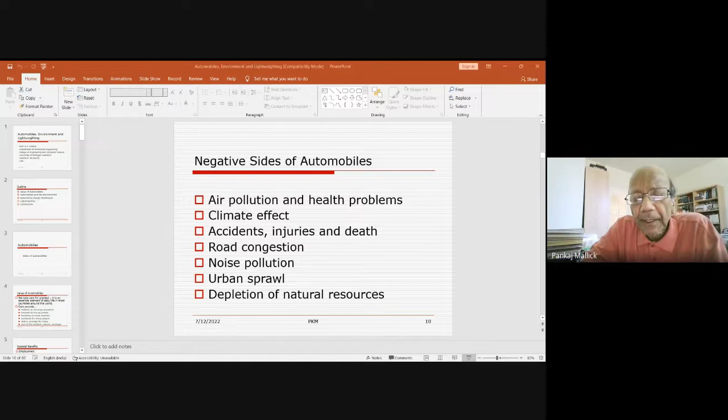I would say I'm at a crossroads between mechanical engineering, materials engineering, and mechanics of materials, or strength of materials. My experience has been in the automotive industry. Before I joined the university, I worked for Ford Motor Company for a number of years, which is not in my bio, but I was there. And I have had many research contracts from automotive companies as well as other organizations such as the Department of Energy and the National Science Foundation.

What I decided to talk about today is, in my opinion, very important for all of us: the environment, and what's the relationship between automobiles and the environment, and also how we can mitigate the problems we have with the environment. That's the topic I have selected.

With that, let me go to the first slide, if you don't mind. Can you project the first slide, please? I was able to see it before. Now I can see it. Yeah, Dr. Das, I think.

So that is the topic: automobiles, environment, and lightweighting. Can you go to the next slide, please?

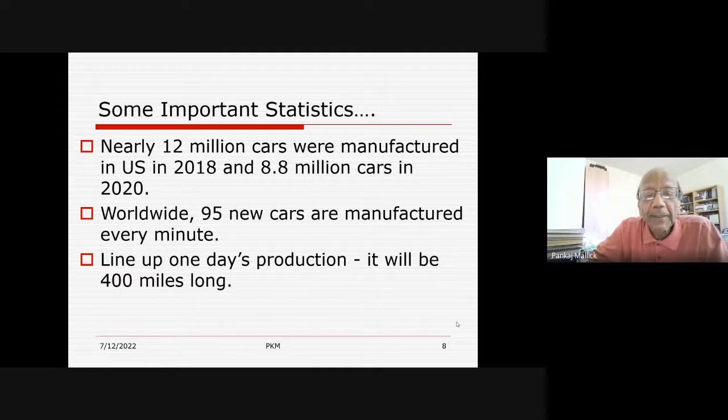Okay, so I've talked about the good things. Let's talk about some of the bad things that automobiles do to us. Negative side of automobiles: obviously it creates air pollution and health problems. It is connected to global warming through greenhouse gas emissions. It causes accidents, injuries, and death.

I remember when I came to this country in the late 1960s, 1967. Around that time, about 20,000 to 30,000 people were killed every year in automotive accidents. Now it's less, but it's still quite a large number.

It causes road congestion, noise pollution, urban sprawl, which means that instead of living in the city, people move away and live in suburbs, traveling to their employment places in the cities. That's actually a big problem in this country right now, because the cities are dying, whereas the suburbs are growing. And for people to go from suburbs to the cities, they have to build highways and maintain them. So the cost of doing all of this is tremendous.

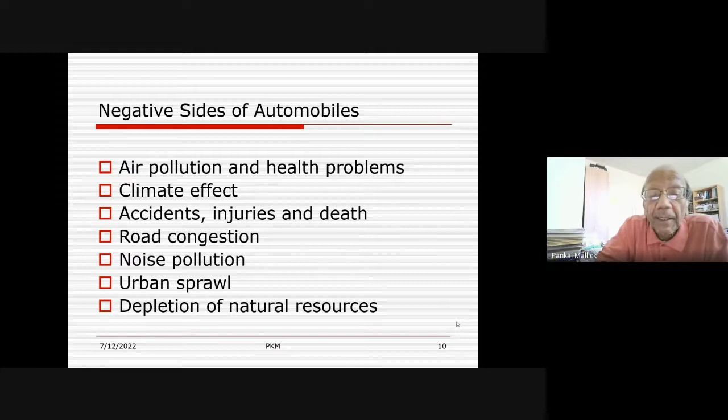Also, depletion of natural resources, because we use petroleum, a natural resource, or natural gas, also a natural resource. We may not have petroleum and natural gas forever. In a couple hundred years, although we obviously will not be alive to see this, our children and grandchildren and their children will suffer if we run out of natural resources. Next slide, please.

So air pollution, health problems, and greenhouse gas emission - these are three very negative sides of an automobile, caused by three kinds of emissions. One kind comes out of our tailpipes: hydrocarbons, nitrogen oxides, carbon monoxides, carbon dioxide, particulates if diesels are used, evaporative emissions, and refueling emissions. Those are mainly hydrocarbons.

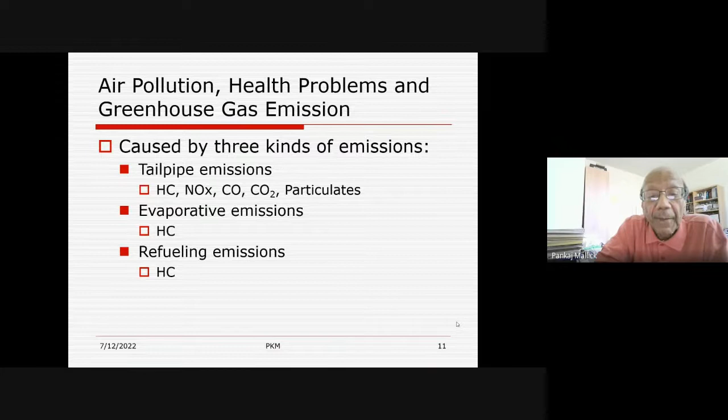Hydrocarbons cause greenhouse gas effect. They also cause smog, reacting with nitrogen oxides to produce ozone. They cause eye irritation, lung damage, respiratory problems, and are potentially also carcinogenic.

In fact, one of the reasons many medical experts believe that children are getting more asthma today is because of all of these pollutions that are created not only by automobiles but other products that we use. So it is highly irritating.

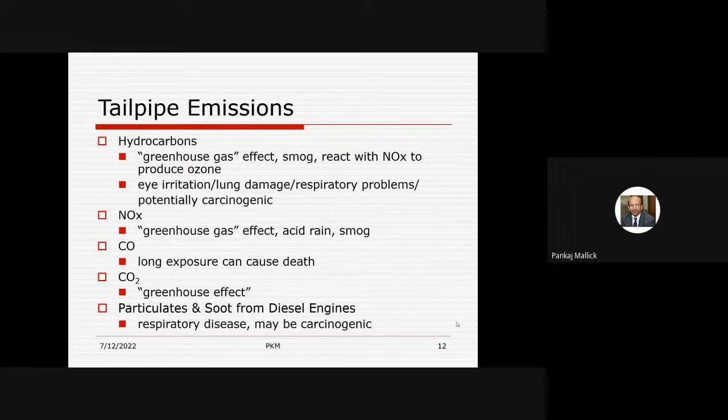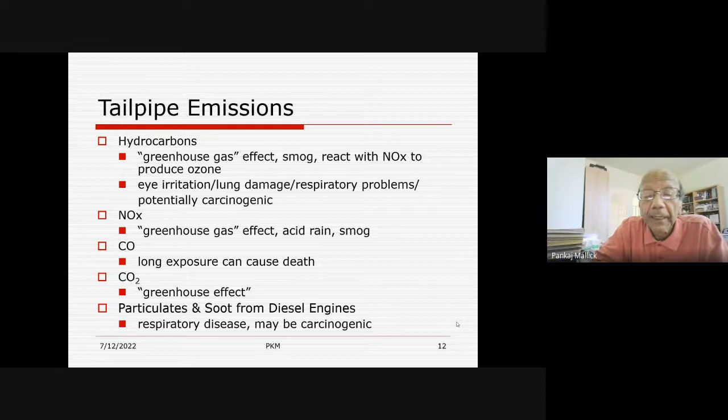It combines with moisture to create acid rain. It's also a cause of smog. Carbon monoxide, long exposure can cause death. Carbon dioxide obviously has a large greenhouse effect, but hydrocarbons actually have a larger effect than carbon dioxide itself, because hydrocarbons stay in the environment for a longer period of time, giving them a higher greenhouse effect than carbon dioxide. And particulates and soot that come out of diesel engines also cause respiratory disease and may be carcinogenic.

Other problems: when you fill gas tanks, we actually emit hydrocarbons from gasoline vapor evaporation. Although that may seem like a small amount, it can still add up to cause big problems. Refrigerant causing ozone layer damage, CFC, has long been replaced now with less harmful refrigerants, but that was one of the main reasons for causing ozone layer depletion several years ago.

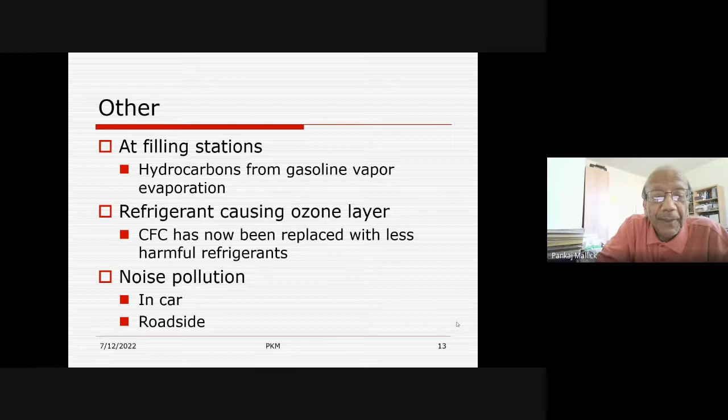Also, noise pollution - how can you ignore that? In the car, while you are driving or sitting in a car, and also people who live on the sides of roads, are bombarded by the noise created by cars going by.

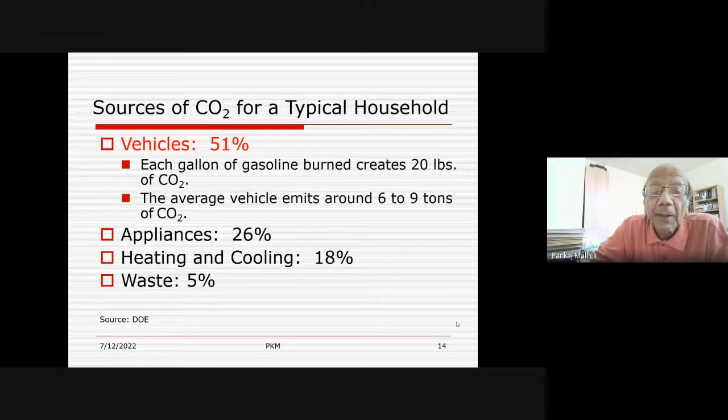Now, each gallon of gasoline burned creates 20 pounds of carbon dioxide. The average vehicle emits around 6 to 9 tons of carbon dioxide per year. Can you imagine the amount of carbon dioxide that we ourselves create because of the cars that we drive? And that, as this slide says, is the largest amount that we create in our own households.

This is a pie chart which shows the US greenhouse gas emissions. On the left side, this is 2017. It has improved slightly, but not much. Out of all the greenhouse gases emitted in the United States in 2017, 82% was carbon dioxide.

If we look at the right side, it's the total US gaseous emissions by economic sector: transportation, electricity, industry, commercial and residential, and agriculture. Look at the transportation sector - it is as high as the electricity sector. Electricity sector would be the power plants; they create 28% of the carbon dioxide greenhouse gases emitted in the United States.

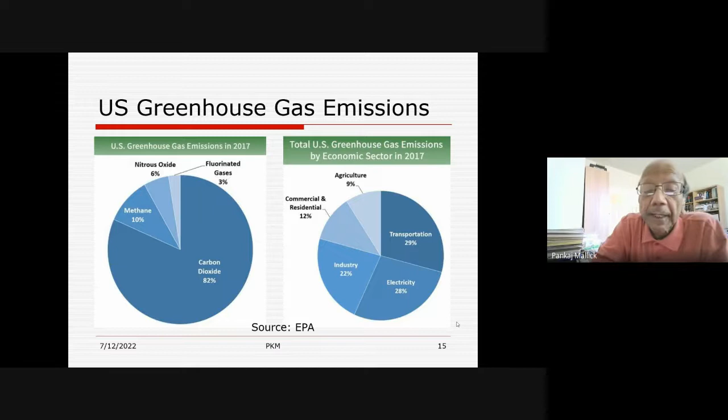But transportation is right next to that. In fact, it's slightly higher, at 29%. So transportation here does not only include automobiles, but also airplanes and other vehicles used for transportation.

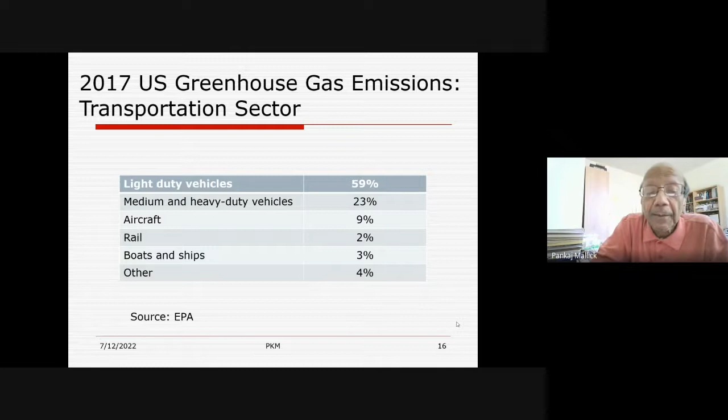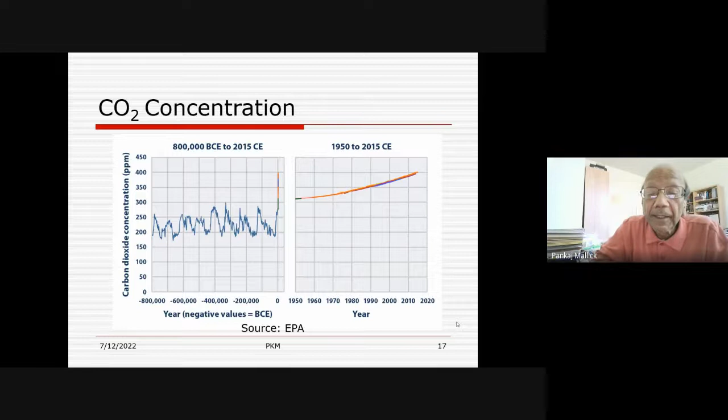This is another statistic I wanted to show: carbon dioxide concentration and how it has increased over the years. On the left side, there's a chart showing 800,000 BCE to 2015 AD. You can see the carbon dioxide concentration was roughly 200 to 250 parts per million. But since 1950, it has gone up to 400 parts per million, and it is increasing - it has an increasing trend. That is one of the reasons why global warming is taking place.

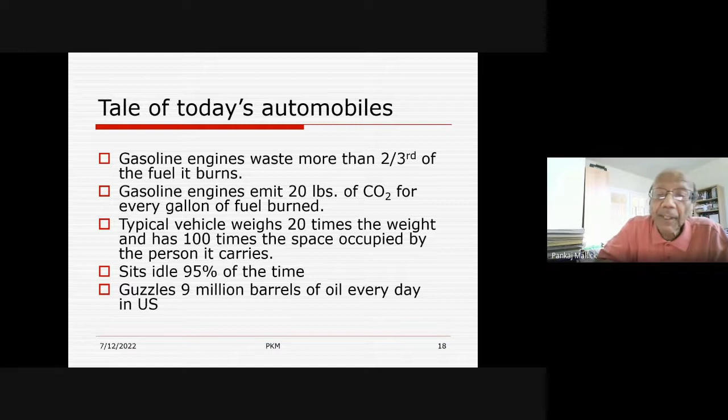Why is fuel economy important? I don't have to probably show this slide because I have already made my points, but it is clear that it will save money for the vehicle owner. We tend to ignore that, but it can save a lot of money.

The gasoline price here is going through the roof. I'm sure it's the same thing in India. I read it on the web every day - how the price of gasoline has gone up or is going up. It's the same all over the world. The gasoline we used to buy here about 2 years ago for less than $3 per gallon is right now about $5 per gallon.

And so it will save money if we can make the cars more fuel efficient. It reduces emissions, reduces oil consumption, and increases energy sustainability.

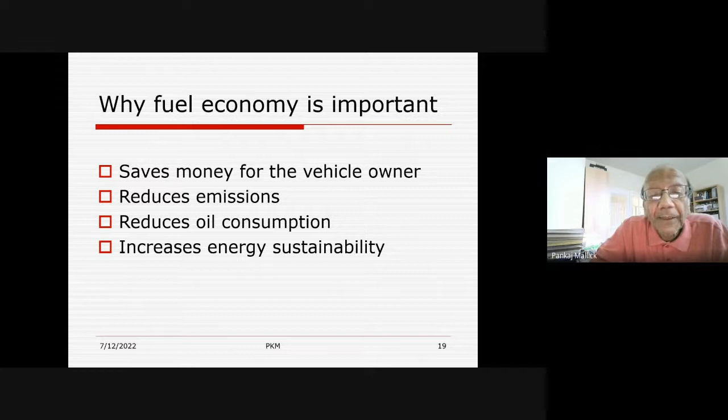This is another slide I wanted to show: if we can increase the miles per gallon that we drive, we can actually reduce the carbon dioxide that we create. If a car has a fuel economy of 15 miles per gallon, it will create 12.2 tons of carbon dioxide per year. But if it's 45 miles per gallon - we are not there yet - it will create only 4.1 tons of carbon dioxide per year. So fuel economy is very important. Here we're showing 15 to 45 and a reduction of carbon dioxide by almost 3 times. So 3 times the fuel economy in the vehicles we design will reduce the carbon dioxide emission by 3 times.

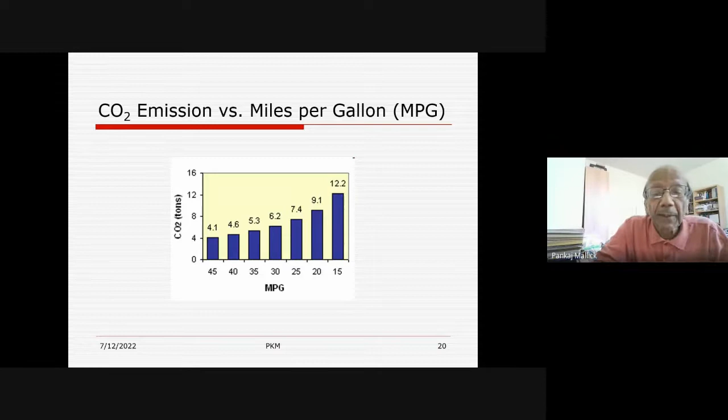So in this country, there is something called CAFE standard. CAFE stands for Corporate Average Fuel Economy, which is a mandatory minimum fuel economy standard for all cars and light trucks manufactured in the United States. These are calculated based on sales-weighted harmonic mean, and it's expressed in miles per gallon of a manufacturer's annual fleet of the current model year passenger cars or light trucks.

It was first enacted in 1975, because that was the first time the United States faced the energy crisis. It was enacted as part of the Energy Policy and Conservation Act, or EPCA. CAFE standards went into practice first in 1978. Can you go to the next slide, please?

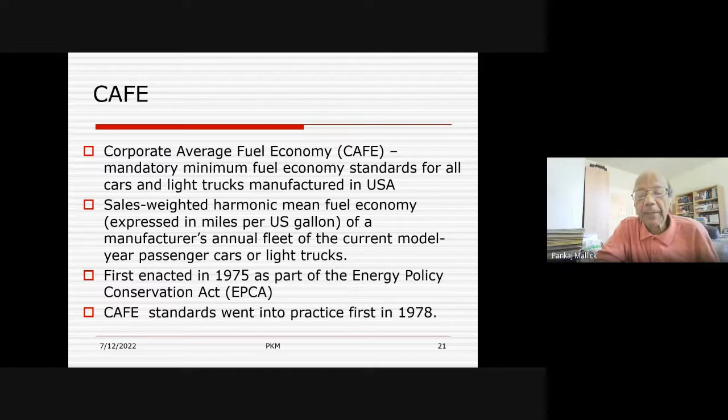If the CAFE standard is not met, the manufacturer pays a penalty in the form of a fine. The fine is $5.50 per 0.1 miles per gallon under the CAFE standard, multiplied by the manufacturer's total production in the United States. So the CAFE standard does not mandate each vehicle type that a particular manufacturer produces. It takes the fleet average and fines based on that fleet average.

Total fines collected between 1983 and 2011 was $844 million. It's not a small amount. The manufacturers in those years paid a hefty fine because they could not meet the CAFE standard. That particular fine is still in place. I was checking that only yesterday, and it is still $5.50 per 0.1 miles per gallon of violation.

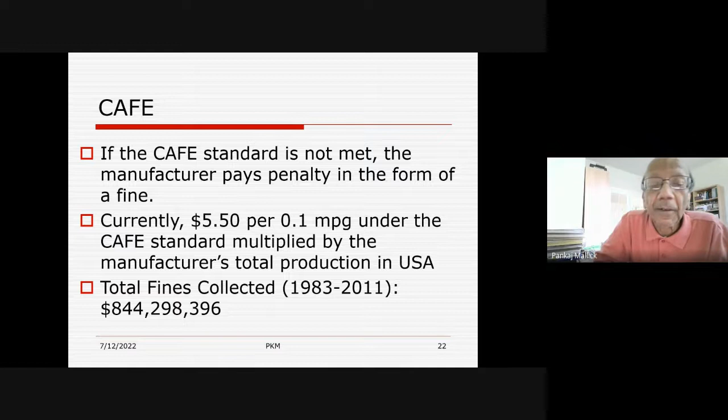Let's go to the next slide, please.

So here are the standards over the years. 18 miles per gallon in 1978, that is when it first came into place. It went up to 27.5 in 1998, in 20 years, then 35.5 in 2016, and it is now mandated to be 54.5 miles per gallon in 2025. So we have 3 more years. By then, car manufacturers will have to make their vehicles fuel efficient enough to meet the 54.5 miles per gallon CAFE standard.

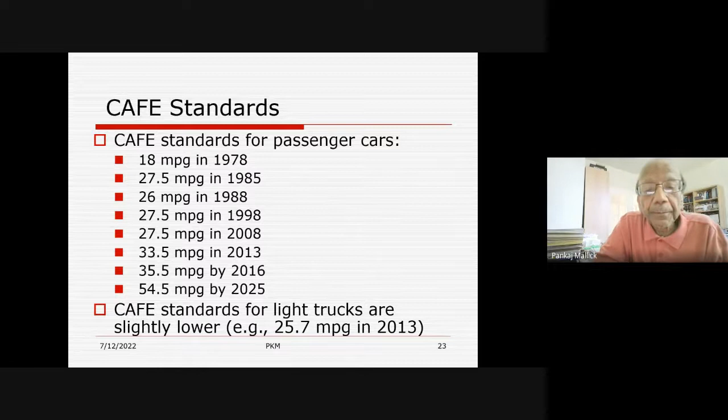CAFE standards for light trucks are slightly lower, 25.7 miles per gallon in 2013. I think if you go to the next slide, you'll see how. Can you go to the next slide, please?

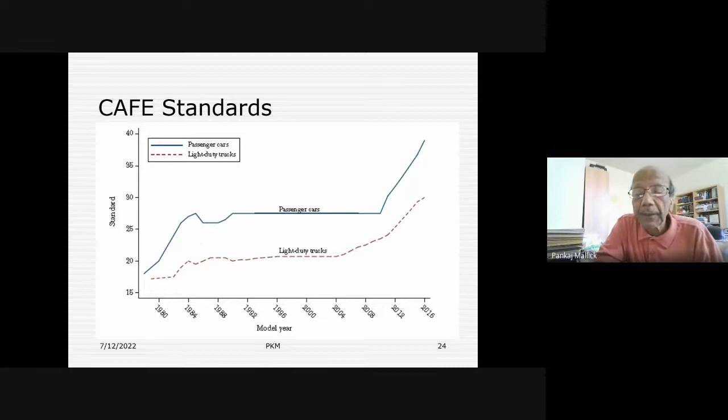So this is how the CAFE standards have changed over the years from 1978 to 2016. For a number of years, the standards were not changed, but now it is in the upswing. And as you saw, in 2025 it is going to be 54.5 miles per gallon.

Go to the next slide, please, which shows how the CAFE standard has been met by the vehicles. We are looking into 4 different curves here. One is the domestic car, meaning the cars manufactured in the United States, shown in the blue line. The black line is for the total fleet. The top line is for the imported cars.

So the imported cars were doing much better in the early years of CAFE standards, but the domestic cars, the cars produced in the United States, are now as good as those imported from outside. Right now, looking at 2020, the CAFE is roughly about 36, 37 miles per gallon, which is quite far from what we have to achieve in another 3 years. So there had been resistance from the car companies, and also some hesitation from the government to mandate 54.5. In fact, the previous president was not happy about that, but I think it has come back again with the current president. Okay, let's go to the next slide, please.

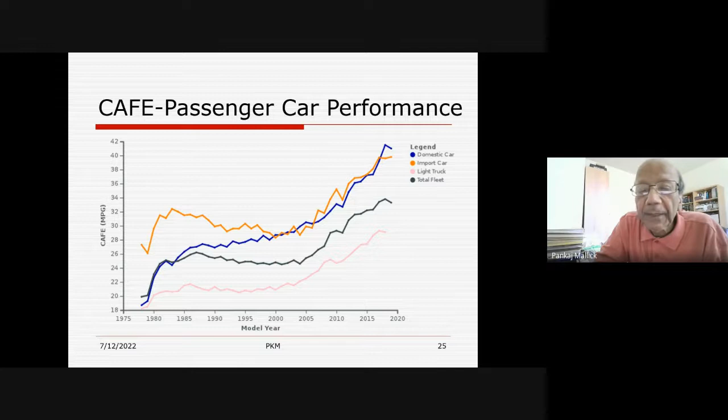So there are things that we can do, and this is what I'm trying to point out here - things we, individually or as a society, can do, and things that the car companies can do. First I'm going to look into societal factors - the things that we can do individually or as a society as a whole. Some of these are already being done.

Our dependence on motor vehicles is not going to change, but can we reduce the number of journeys we make? In the USA, 85% of journeys are made by car, but 20% is purely for social and recreational purposes. Can we reduce that? Home officing - some of this is already occurring, not because we are kind enough to think about the environment, but because of COVID. Video conferencing, internet shopping - all of these can contribute to less use of gasoline.

Can we use alternative forms of transportation, public transportation? In India, it is very common to use public transportation, but here it's not that common. It accounts for only about 2% of passenger travel in the United States. Can you imagine that? Only 2%.

If you ride in a bus from a suburb to the city, which I've done many times, you will see hardly a few passengers in the buses, because most people have cars, not just one, two, or more, and so therefore they're reluctant to go by bus. And there are, of course, also not many buses available in many cities, or public transportation available in many cities.

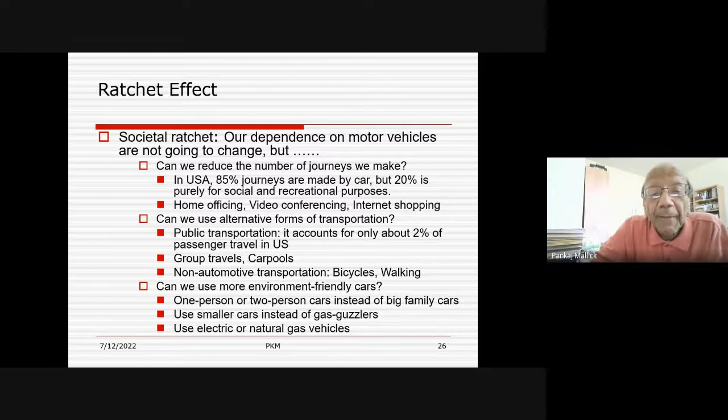But the industry, the automotive industry, has also a big responsibility. And the larger the vehicle, the more profit they make. So the question then I pose is, can you design and promote? That's the thing that I think is more important, promote smaller cars instead of more profiting gas guzzlers, such as SUVs, light trucks, etc. Can you do that? As I said, the bigger the car, the more expensive it is, the more profit is made by the car manufacturers. So they have less of an incentive to make smaller cars.

In fact, if you look at bigger cars such as SUVs and light trucks. Can you design and promote more environment-friendly cars? Design and promote cars that use renewable energy sources such as biofuels and hydrogen fuel cells. Design and promote electric vehicles.

Now, some years ago, I would say about 20 years ago, fuel cell vehicles were being developed. There are not fuel cell vehicles on the road, but a lot of research money was spent on fuel cell vehicles. Now you hardly hear about them. Now the buzz is about the electric vehicles. GM and Ford and many other companies have invested large sums of money in making electric vehicles. Tesla, of course, is famous for it. But we do not have as many electric vehicles today as we hear about them.

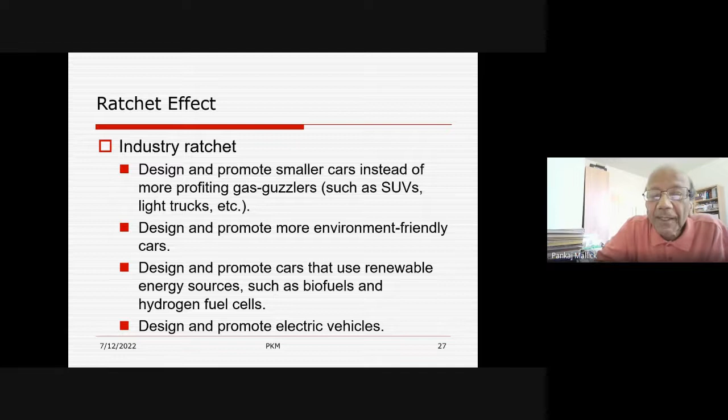So now I want to go into automotive design challenges a little bit, talk about them. Next slide, please. So, challenges to the automotive industry. This is something that I think the automotive industry knows very well, and they're working toward it.

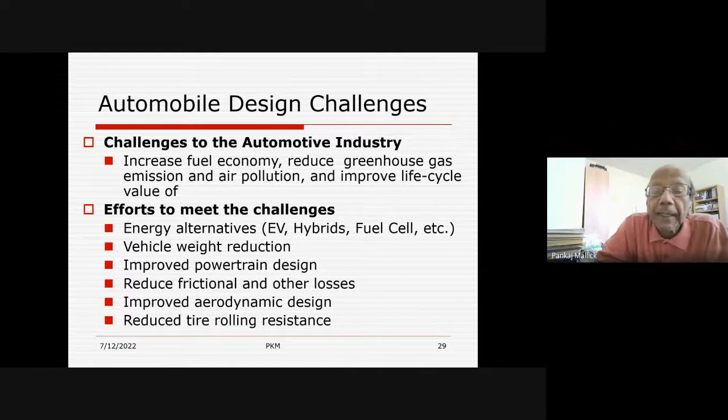Increase fuel economy, reduce greenhouse gas emission and air pollution, and improve life cycle values of automobiles. Now, efforts to meet these challenges include looking into energy alternatives such as electric vehicles, hybrids, fuel cells, etc., vehicle weight reduction, which I will talk about in a few slides, improved powertrain design, reduce friction and other losses, improved aerodynamic design, and reduce tire rolling resistance. These are all of the things that need to be done in order to improve fuel economy, make our vehicles more environment friendly. Can you go to the next slide, please?

So the emphasis should really be to reduce these energy losses, and that's being done through a variety of design changes that have been occurring over the years, particularly the last 20 years. Let's go to the next slide, please.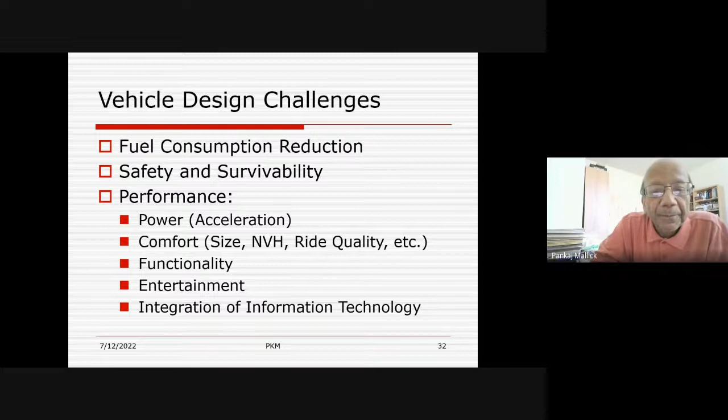Let's go to the next slide, please. So lightweighting is important. Every 10% reduction in vehicle weight can result in 5 to 8% greater fuel efficiency. Reducing vehicle weight by 100 kilograms results in carbon dioxide reduction of up to 12.5 grams per kilometer. So lightweighting is one aspect of the design challenges I pointed out.

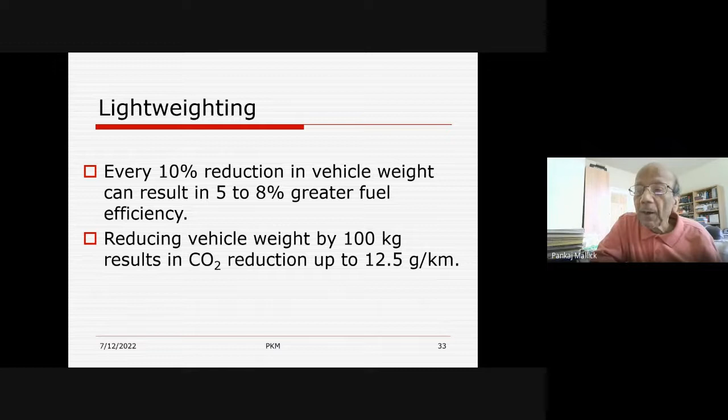We want to make the vehicles lighter. That will improve the fuel economy. It will also reduce the carbon dioxide or greenhouse gas emissions. Let's go to the next slide, please.

Vehicle lightweighting can occur in many different ways: use structures that are lighter instead of body on frame, use body in white or space frame, use materials with lower density or higher mechanical properties, reduce the number of components by parts consolidation and/or elimination, and redesign parts to reduce thickness.

Reduce factors of safety by reducing variability and/or uncertainties and improving reliability. This requires more testing and design validation. The current trend is to reduce the testing phase and design validation phase - everything is done on computers these days, with very little physical testing.

In my opinion, that is one of the reasons we still have high factors of safety integrated in our automotive designs. Factors of safety in designing vehicles are in the range of 5 to 8, whereas when you design an aircraft, the factor of safety is less than 2, or around 2. So there's a big difference in the factors of safety in the designs we do for automobiles versus aircraft. Also consider secondary weight-saving possibilities, for example using smaller engines and so forth.

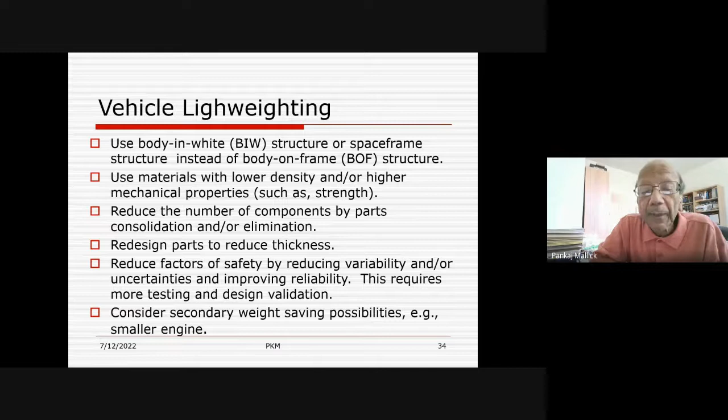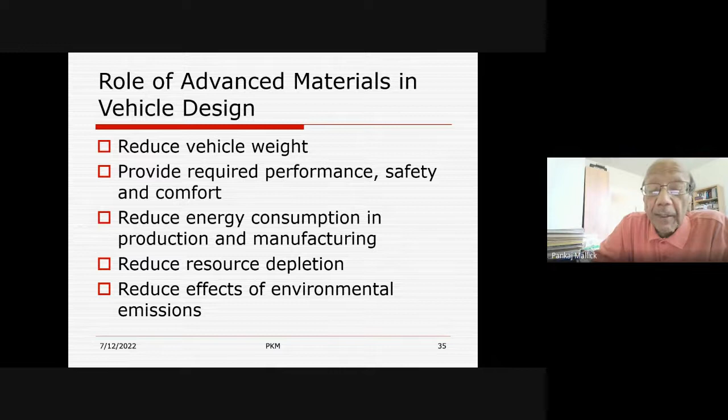Let's go to the next slide, please. So, the role of advanced materials in vehicle design - they will reduce vehicle weight, provide required performance, safety, and comfort. When you are looking for advanced materials in vehicle design, you have to think of all this: reduce vehicle weight, provide required performance, safety, and comfort, reduce energy consumption in production and manufacturing, reduce resource depletion, and also reduce effects of environmental emissions. Let's go to the next slide, please.

So these are the different materials that we use in our vehicles, and their different percentages are in there. I don't want to go into the tables in too much detail, but steel is still the largest amount of material that we use. 55% of the vehicles today are made out of steel. There are aluminum alloys and polymer matrix composites that are used more and more, but we still have vehicles made out of mostly steels.

Let's go to the next slide.

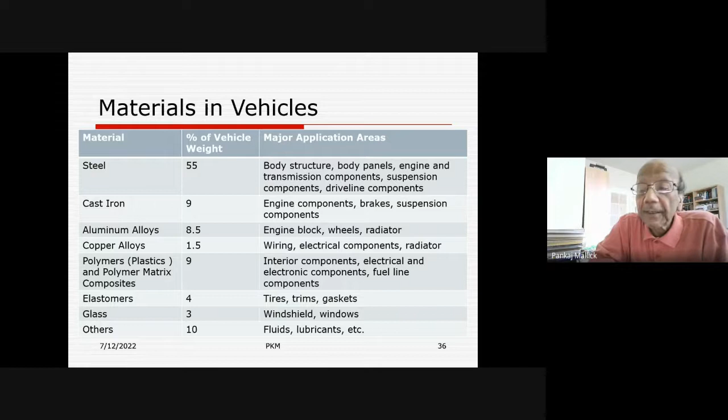So here are the lightweighting materials. Yes, there are steels, but steels are different today, particularly for automotive steels, than they used to be 20 years ago. 20 years ago we were using low carbon steels mostly, but now we have advanced high strength steels. We also have something called third generation steels. So steel companies are evolving into making better steels, better meaning not just in quality, but also in mechanical properties. The problem is you cannot change the density. The density of steel is still 7.8, as you'll see in a slide or two.

But you can improve the strength of the material, and that's where research on steels is heading. We are using more aluminum alloys. In fact, there's also talk about using magnesium alloys, and of course composites - carbon fiber reinforced polymers, glass fiber reinforced polymers, also natural fiber reinforced polymers. Here we're looking into natural fibers made out of coir fiber, jute fiber, hemp, flax fibers, things like that. Now they're not going to be making the entire vehicle, but there are places where you can put natural fiber reinforced polymers, which would give you lower weight.

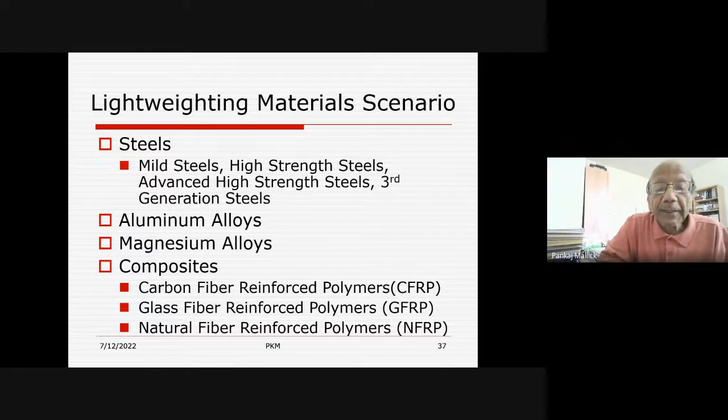So here's the comparison that I quickly wanted to make. DQ steel is the standard low carbon steel. Look at the density, 7.87 grams per centimeter cubed, which is the second column on this particular table. The modulus is 207 gigapascal. Yield strength is 186, tensile strength is 317. Elongation is 40 - that's the ductility.

Look at the DP steel. DP stands for dual phase steel, which is one of the advanced high strength steels. Look at the yield strength of the material and the tensile strength, much higher than the low carbon steels. Then look into something called boron steel. Boron steel has a yield strength of 1100 megapascal and 1500 megapascal tensile strength. So steel companies are producing these high strength steels. The higher the strength, the lower would be the thickness required to design a part.

While the strengths are increasing, the density and modulus do not change. If you go to aluminum 6061 T6, it has a density of 2.7, and that's why there is so much interest in replacing steel with aluminum. Modulus is also much lower, and strengths are also lower. But the good thing is that the modulus to density ratio of aluminum is the same as the modulus to density ratio of steels. So the interest in replacing steels with aluminum comes from the fact that it has a much lower density, yet it has the same modulus to strength, modulus to density ratio.

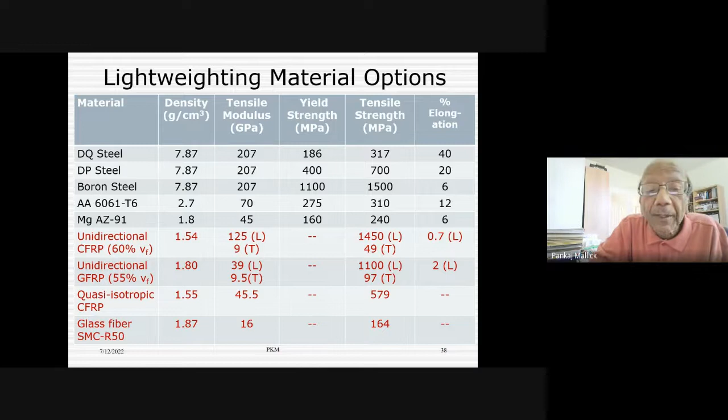Then if you go to carbon fibers and glass fibers, look at the density values - we're talking about 1.54 compared to 7.87. This is the second column of this chart. And then look into some of the strength properties that we have. Now they have to be designed properly. It is not an easy task to design a composite for an automotive component, particularly if it has a complex design, and it has traditionally been used for steels. But it can be done. There are many examples of where it is being done, and I'll show you a few of them a little later. Composites can actually bring much larger weight savings and therefore can increase fuel economy.

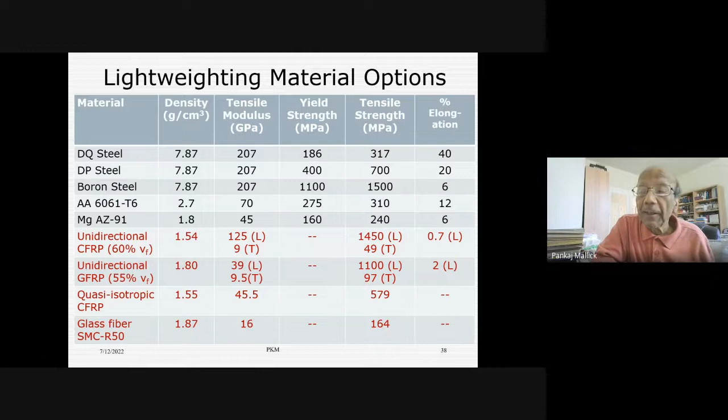Okay, let's go to the next slide, please.

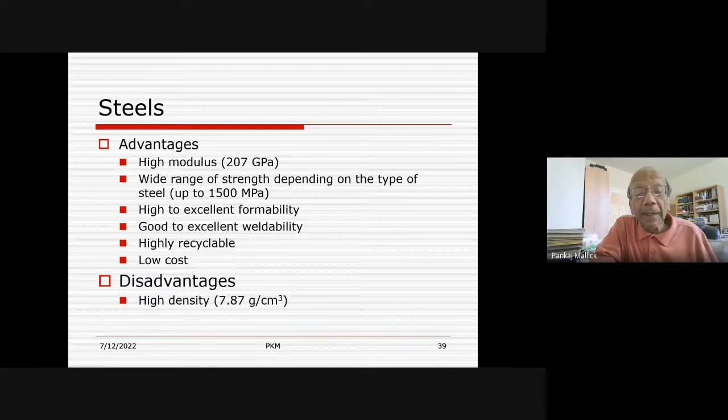So quickly, these are some of the advantages of steels. We've got high modulus, highly recyclable - that's an important aspect of material selection today, can it be recycled - and very low cost compared to other materials. But the disadvantage is the high density, 7.87 grams per centimeter cubed.

Let's go to the next slide, please.

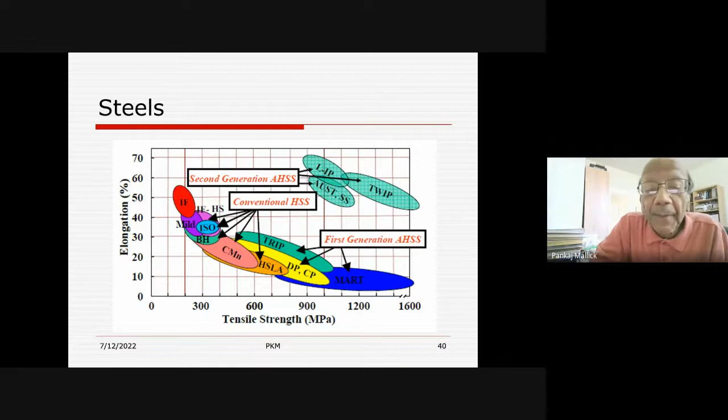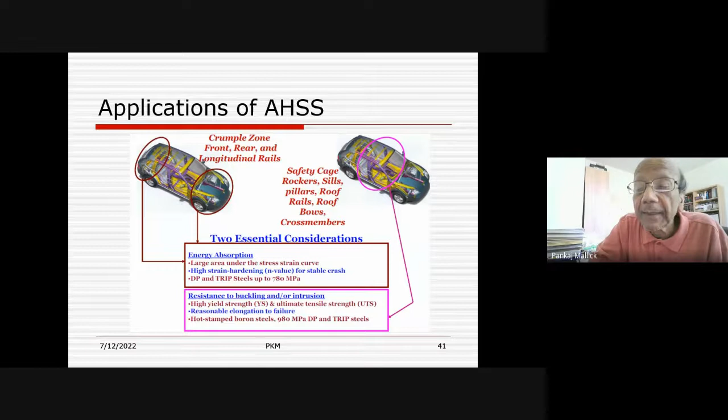Here are some of the applications, and the high strength steels are being used in areas where we need more crash worthiness. They actually provide more safety and survivability for the passengers and the drivers. So they are in the front ends, on the back ends, also in the roof or on the sides, mostly in the frames.

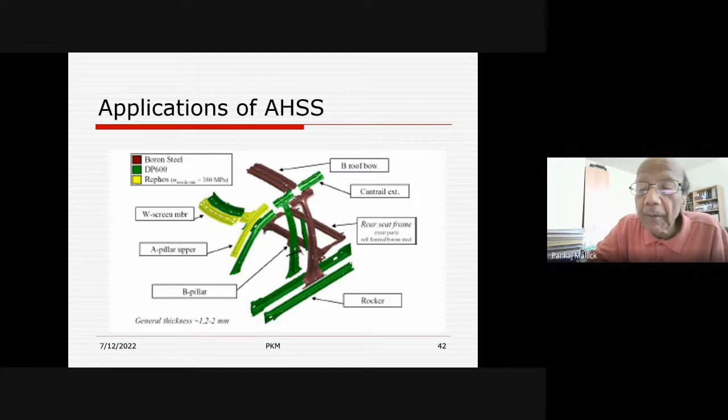You will see the same thing here. The A pillars and the B pillars and so forth, these are required for high crash resistance, crash worthiness. That's where the high strength steels are used. The boron steels that I was talking about before with 1500 megapascal strength values would be on the B roof bow or on the B pillar of this particular vehicle.

Now, going to the aluminum alloys, I already pointed out low density, but there are many disadvantages: low modulus and lower formability compared to steels. But we are using more of it because it can give us a weight advantage.

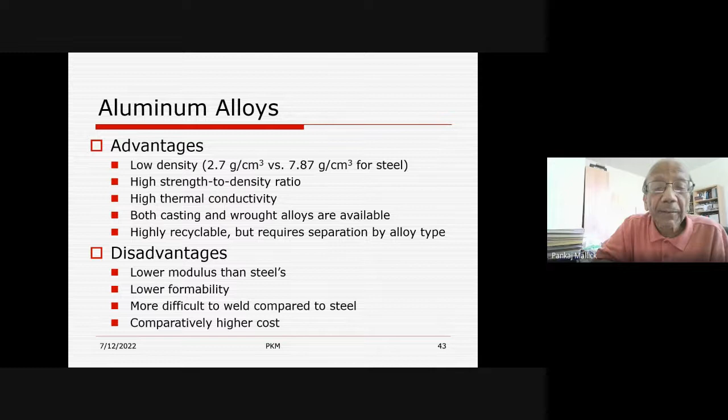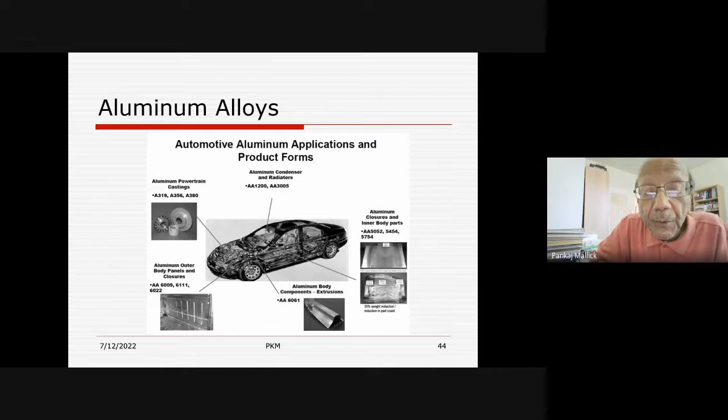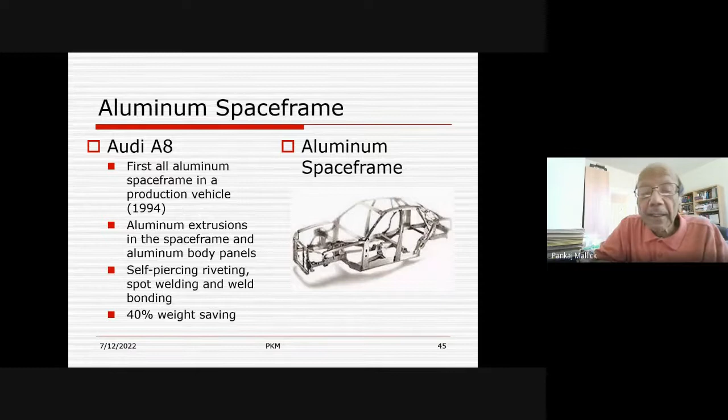And here is another example of where aluminum is being used. This was done in 1994 by Audi, the first aluminum space frame structure, with aluminum extrusions in the space frame and aluminum body panels. But aluminum is not easily joined by spot welding, so they had to come up with a technique called self-piercing riveting. A lot of the structure here is made out of that. But they achieved 40% weight saving compared to a vehicle made out of steel of the same size and quality.

And here's some more examples of use of aluminum.

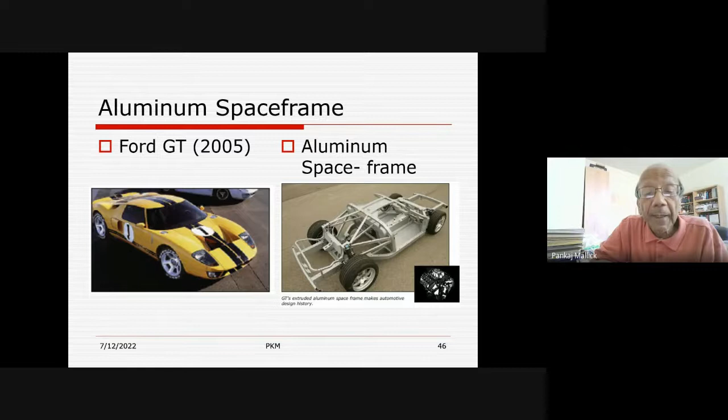There are many challenges, as you can see here. Formability is a problem, joining is a problem. So all of these are addressed by more research and development, not only in the car companies themselves, but also the suppliers. Aluminum suppliers are involved in many of the research that's required for improving the application of aluminum alloys.

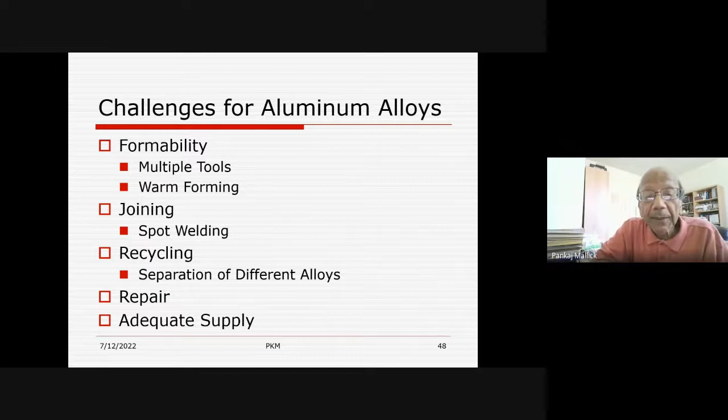And then the next one is magnesium. Low density, you can see 1.74 compared to steel 7.87. Many disadvantages, of course, comparatively low modulus, only 45 gigapascal compared to 207 for steel. But because there is this low density advantage, magnesium has been touted anyway for many applications in automobiles. It really hasn't caught up much, but it is still a possibility of seeing magnesium in the instrument panel or in the front end of the vehicle.

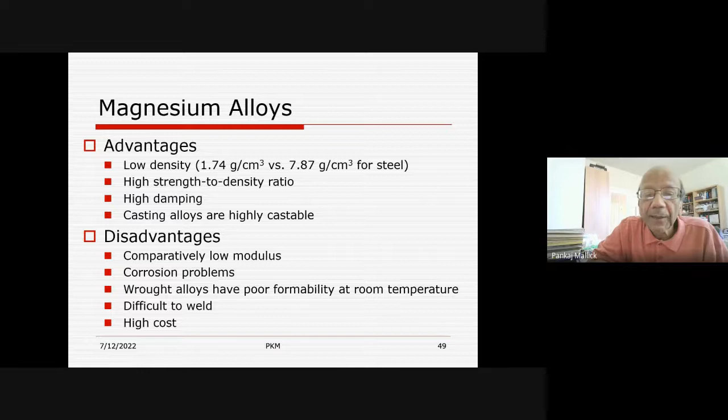Here are some examples of magnesium alloys: engine block, front cross member made out of magnesium.

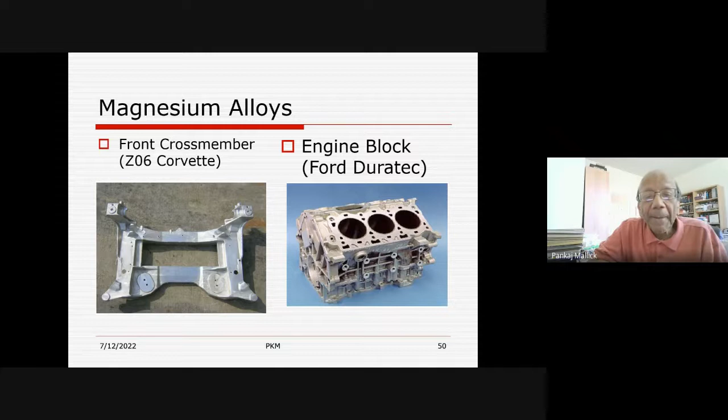Then the polymer matrix composites. The biggest advantage would be the low density, but more important than that would be the very high strength to density ratio and high modulus to density ratio. You can achieve remarkable weight saving using polymer matrix composites, but there are many problems, one of them being the high cost. And this is where the car companies are very sensitive. They do not want to use too much of carbon fibers today. That's where the weight reduction would come in because of carbon fibers' high cost.

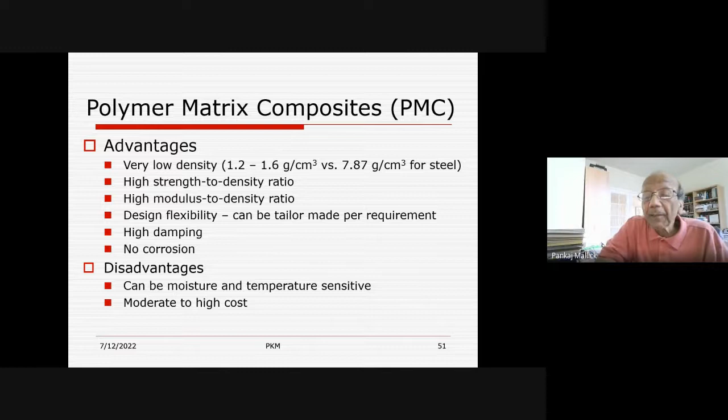So here you're looking at various applications that are being thought of or being used: body panels, body structural components, frame and subframe sections, chassis components, body in white structure. And you'll see some examples in the next slide.

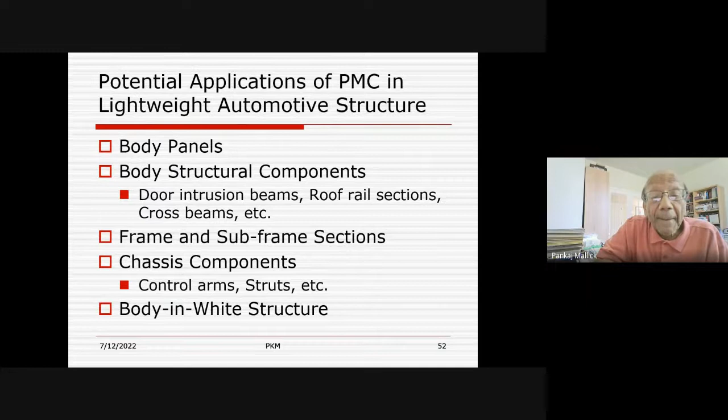CFRP has a higher weight saving potential than GFRP. CFRP stands for carbon fiber composites, GFRP for glass fibers, but they're high priced. And so car companies shy away from using carbon fibers. This is one of the reasons, not the only reason, but this is one of the reasons why carbon fibers are not used much in motor vehicles today.

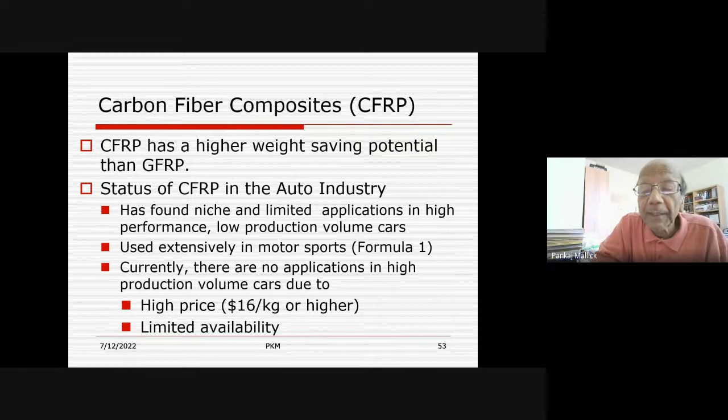But if you think of it, the Boeing 787, the entire fuselage is made out of carbon fiber composites. If you go to the other aircrafts made by Boeing, you will see more and more carbon fibers being used in those aircrafts, but not in the automotive industry. But there is a great possibility of doing that in the near future, particularly when you have to meet a very high CAFE standard.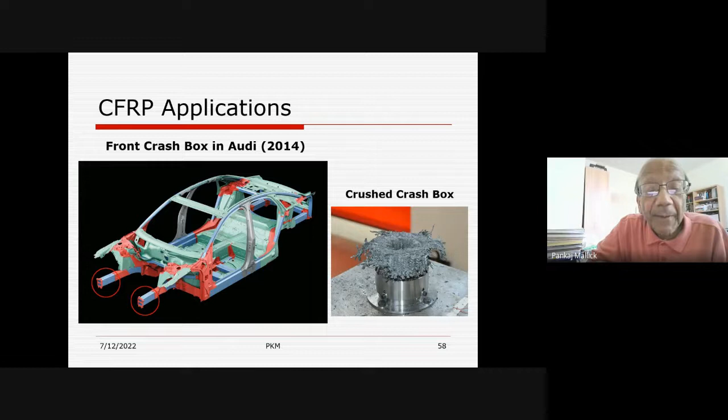And here I wanted to point out that all of the materials I talked about have good attributes and bad sides. So the thinking now is that we're not going to make a car out of carbon fibers only, or out of steels only. What we need to do is look into how we can use various materials according to their advantages, and where we can put them to their best ability.

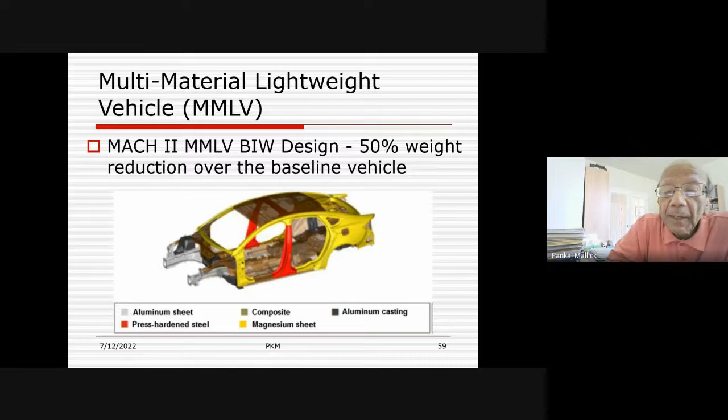Look at the weight saving that was achieved by using these multi-materials in the right places, a 50% weight reduction. That's remarkable. It's not in the market, this was a demonstration piece that was made. But we need to actually think more about this lightweighting, which would give us not only fuel economy improvement, but also greenhouse gas emission reduction.

So in conclusion, automobiles are not going to disappear. However, future automobiles will be much different from what we drive now. As a society, we must do everything individually as well as collectively to reduce greenhouse gas emissions and conserve resources. Lightweighting is one option. Other options are alternative power sources, electric vehicles I mentioned, improved vehicle design, adopting good driving practice, and also reducing travel demand. With that, I'll conclude. If you have any questions, I'll be happy to answer. Thank you very much.

I went a little too fast because I lost a little time in the beginning. I'm sorry about that, but I took probably more than an hour, I think, to present my slides.

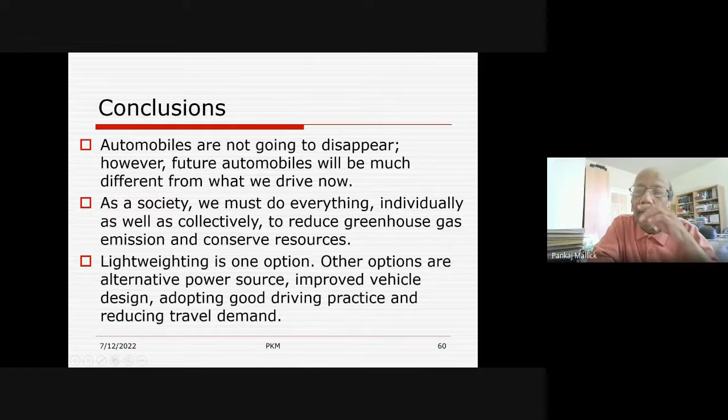Thank you, Professor Mallick, for your nice and thoughtful presentation. You have discussed various aspects of lightweight vehicles, starting from the value of the automobile and different societal benefits versus automobiles, and you have mentioned various emissions aspects, greenhouse gas emissions, and finally the lightweight vehicles.

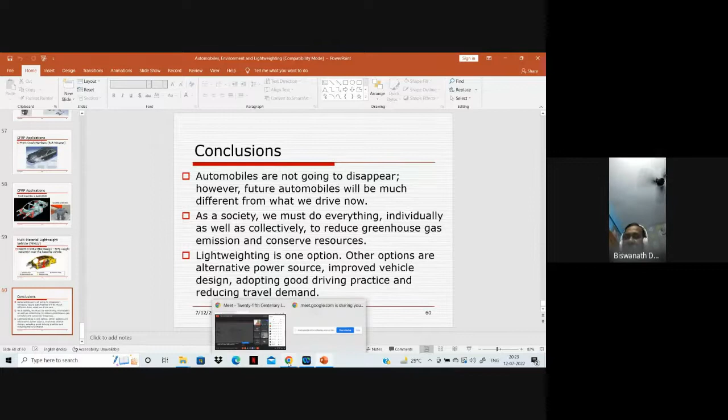You explained about CAFE, what will be the range of CAFE by 2025, 54.5 miles. But in India, I think there is no such CAFE standard where the government can actually penalize the manufacturer. So I think to maintain that CAFE or an Indian standard, that type of fine or penalty is required.

So that we can get high fuel economy cars. And lastly, you mentioned about lightweight vehicles, how to reduce the weight of the vehicle, and it should be multi-material, the right material at the right place for the right purpose, so that low cost and sustainable, economical lightweight vehicles can be manufactured. Thank you very much, Professor Mallick, for your nice presentation. Now it is open for discussion, and anybody can ask questions or give suggestions.

May I put one question? I am Professor Shantanu Das from Kalyani Government Engineering College, not the Shantanu Das from IIEST. I think magnesium was also projected as a lightweight material, but sometimes people say that magnesium can ignite at certain temperatures. So any comment from the speaker, please?